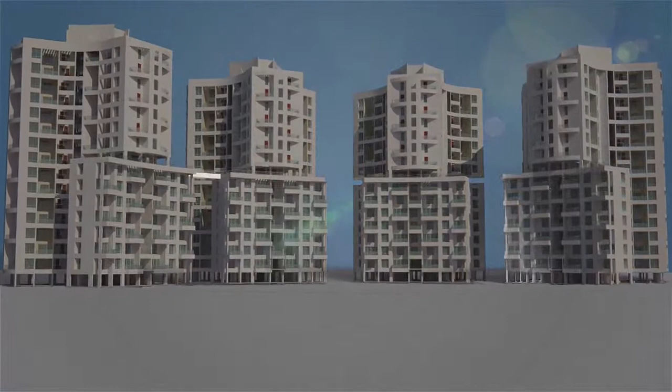The core elements of any structure are stability, strength, and quality. RCC becomes the backbone of any structure. To create world-class architectural designs, it's important to have the right RCC structure to bring forth the design in reality.

In the RCC structural design field, leading from the front is a company with expertise in complex structures as well as conventional structures, popularly known as GA Bhilare Consultants Private Limited.

Our company was established in 1988 with a small team working on small scale projects. We aspire to maintain stability, safety, quality and economy for each design.

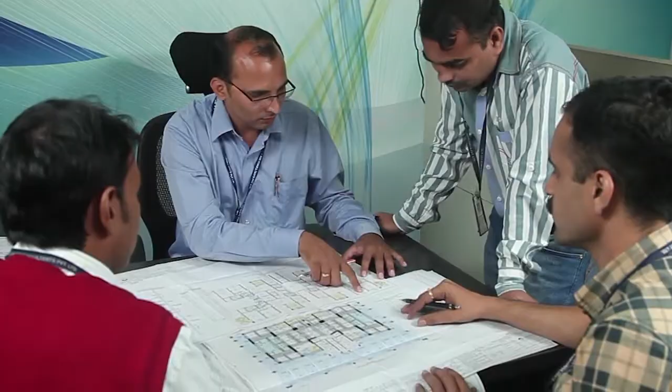The design team at GABCPL handles various types of structures. We have introduced and implemented new types of technologies like precast, post-tensioning, steel deck structures, and concrete shear wall structures.

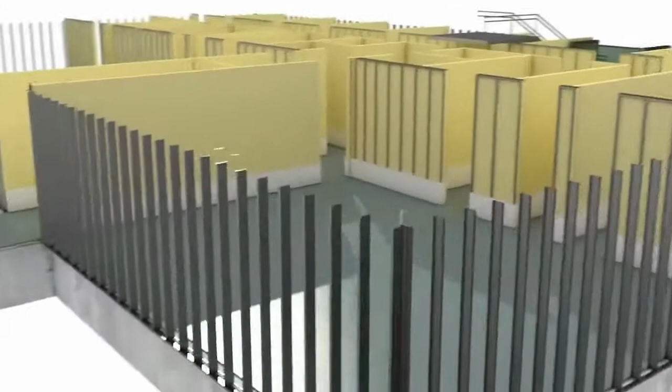These help us achieve speed and quality of construction and mechanize the civil industry all over India. We upgraded ourselves at a technical level as we design geometrically complex structures.

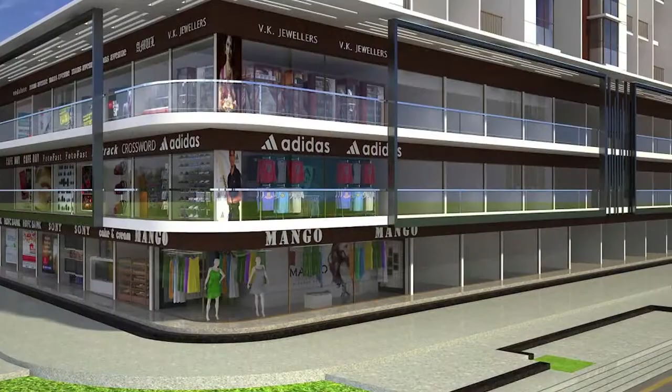Our team has the expertise in building high rises, mass housing projects, bungalows, commercial spaces and industrial buildings using advanced construction technologies.

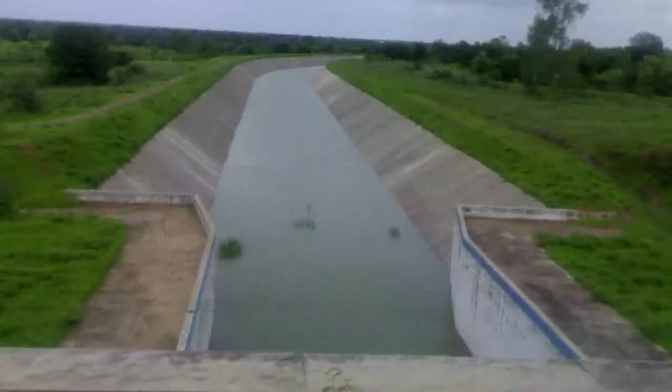Our team has been designing various types of prestigious projects for the Government of Maharashtra, irrigation department, public works department, and the central government of India.

All the designing is done using various softwares such as ETABS, STAAD and so on.

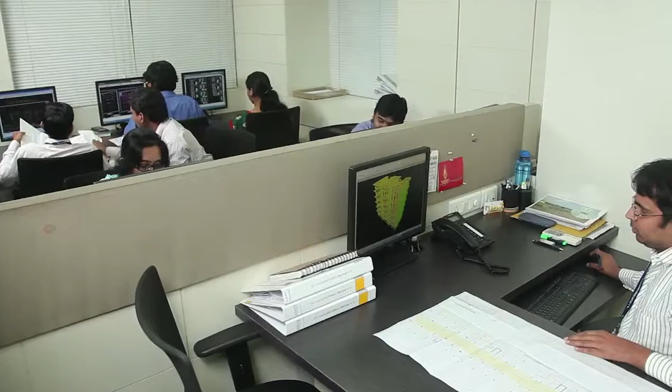Further, we focus on creating a technically efficient team by arranging various training sessions on design software conducted by experts in this industry. Our company grasps new methods and technologies and implements them in the daily work of the organization.

We have customized software for high accuracy in analysis, contributing to accurate and faster design of various structural elements. We have also prepared in-house software for billing with Probity software.

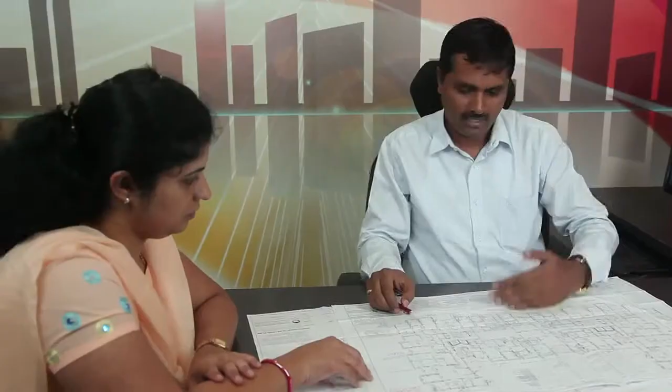While preparing a drawing, our directors, along with team members, always give emphasis on elaborate and precise detailing.

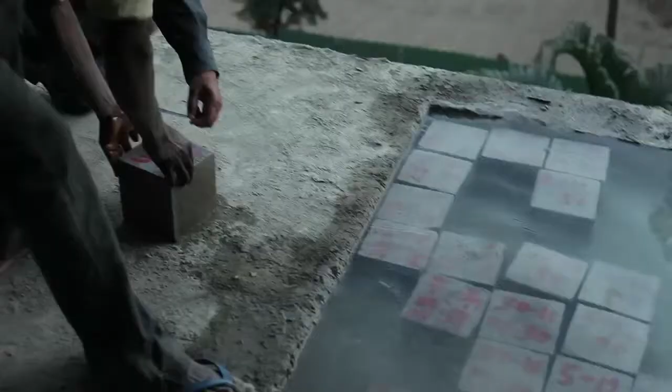For site visit inspection and quality control, we have a team of well-educated, dedicated senior engineers who look after site visits all over the country.

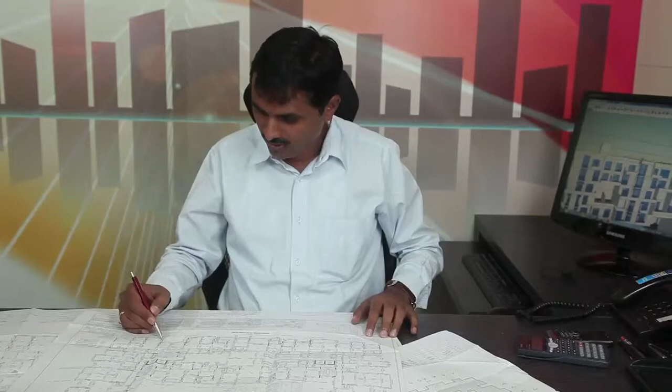Which benefit us in solving problems, accomplishing tasks faster, developing good relationships, and delivering projects on time.

During this journey, we have set our core values as honesty, hard work, continuous self-improvement, responsibility and respect to customers. These core values are always in the minds of each and every team member.

Because of this, we are able to gain and retain the trust of our clients. The company policies look after construction safety first, and then they look after the costing part.

So minimum cost of steel consumption can come into the project. He is always there to help us reduce our cost and figure out what could be the best means to reduce the cost.

Because of their ability to deliver challenging tasks on time, we have received the Best Project Award for the last 3 years.

We started with a challenging project. We had a commercial project and were looking for solutions but not getting any, which is when we involved him.

And he did really well in terms of finding a solution for my costing, and till date he's my only sole RCC consultant.

Organizations are made by people but grown and expanded because of human beings. This is such a company, GA Bhilare Consultancy Private Limited, who has grown exponentially over the last 25 years.